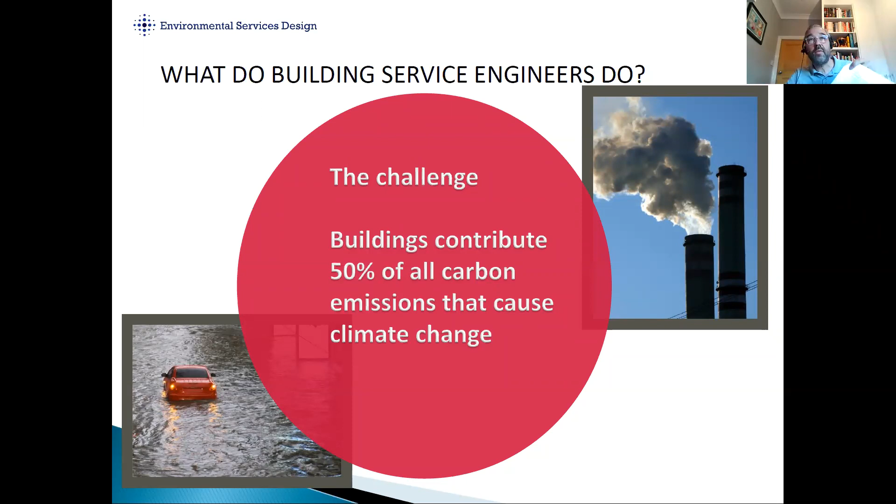Ultimately, aiming to reduce carbon to net zero, we still need to make buildings comfortable and safe places to live, work and play. So we use ever more efficient equipment and system design techniques.

Some of these involve low and zero carbon and renewable energy that you may have heard discussed on the news and in magazines and newspapers. LED lighting uses less energy than conventional lighting. Photovoltaics generate electricity on the rooftops of buildings. Heat pumps are a way of generating heat in a much more energy efficient way than gas-fired boilers.

Heat recovery on ventilation systems helps us to retain some of the heat that naturally gets extracted from bathrooms and kitchens. We can use solar power to generate hot water now on buildings, and we can use passive ventilation to cool buildings at night time rather than using expensive and carbon costly air conditioning.

All these are becoming much more commonplace, and over the course of your adult life, they'll be easily recognised, and some of the areas of engineering that we're involved in will be much more commonplace in conversations going forward.

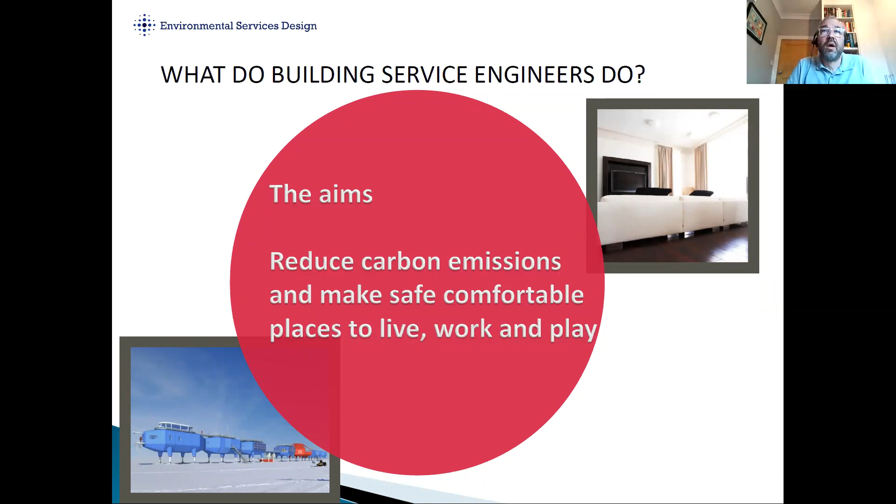In terms of South Kilburn, we're involved today on this presentation because Environmental Services Design are part of a design team looking at the regeneration of South Kilburn. We've been employed by Brent Council as part of a team with the architects, structural engineers, landscape designers and other professionals to help design the redevelopment, which is taking place over a number of phases.

As ESD, we've been working across 3 of these phases over the last 4 years. And those phases alone will deliver over 600 new homes to South Kilburn.

The building service engineers at this early stage of design are involved in undertaking the carbon emission calculations that we project for the new homes, aiming at this net zero carbon target that the government has set.

We'll be looking to plan out the energy supply to the buildings and how this is done in both a carbon efficient way, but also aligned with a much wider district heating system that was being installed across the whole of South Kilburn to provide heat into all the new dwellings.

We look at things like overheating of the dwellings and how we can control this so the new houses and new flats become comfortable places to live as global warming becomes a greater problem, and temperatures generally around London and the southeast of England become warmer.

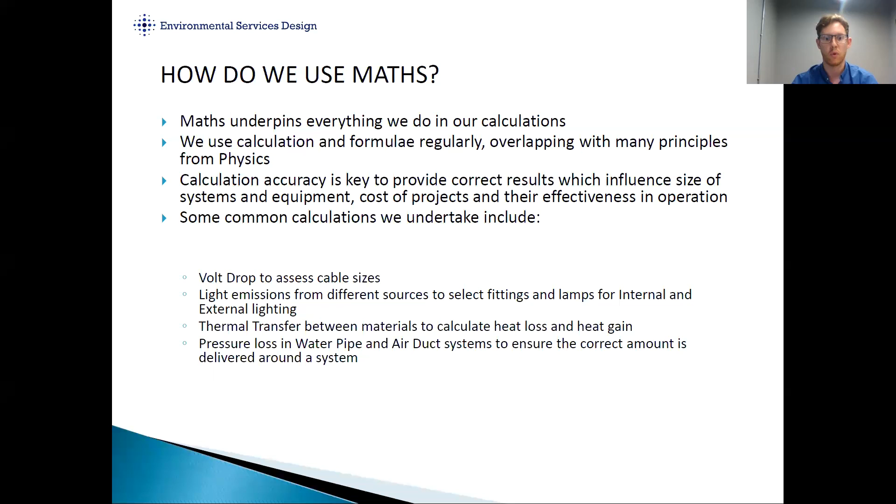So it's used in a wide variety of things, and it's a fundamental part of what we do. I'm going to pass you over to Will now just to do a quick introduction. Yeah, so Joe's an electrical engineer, whereas I'm a mechanical engineer, which deals with more stuff like the heating and the cooling and the water and drainage of systems in buildings.

So for when we do this, we use lots of formula, but the most common formula we use to do the heating and cooling is a specific heat capacity formula, which relates how a change in temperature affects the energy of a material: Q equals mc delta T. That's the fundamental equation that we use. I use it every day. That's the most commonly used, but it's the most important one because it tells you what heat you need in a building.

But we also use more complicated equations, like on the right here, we've got Bernoulli's equation, which relates pressure, velocity, pipe size, and other things for a fluid in a pipe. And we can use that first principle to take it to something like an orifice plate, which is in the bottom left. So an orifice plate is just a device that we use to measure how much flow is going down a pipe, and we can use the difference in pressure at two different points of a pipe to work out what the flow going down the pipe is.

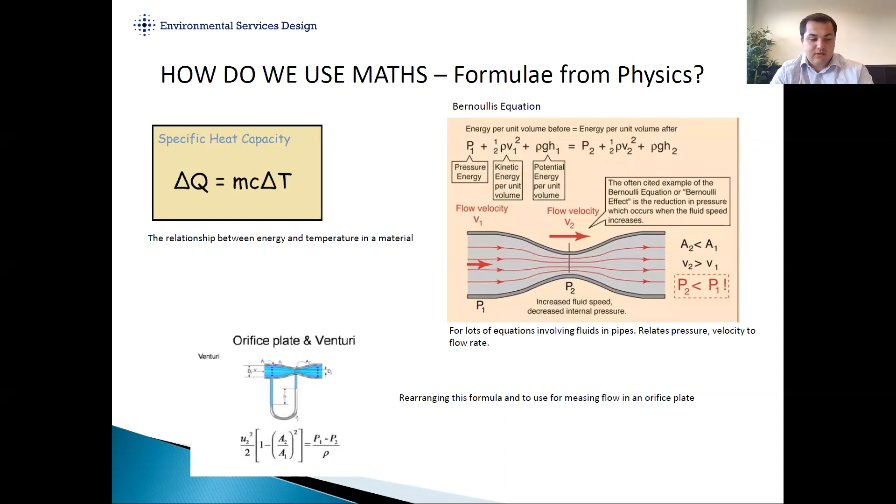And then there's also more complicated things. I said we needed to use Q equals mc delta T to work out how much heating we need in a building or how much flow we need down the pipes. But for that, we also need to know how much energy is lost from a room, so how much heating you need to put in. We do that by calculating heat losses. And there's loads of complicated formula there, which you can use to work out how much heat's lost through a window, how much heat's lost from room to room. You might even gain heat through your windows from the sun.

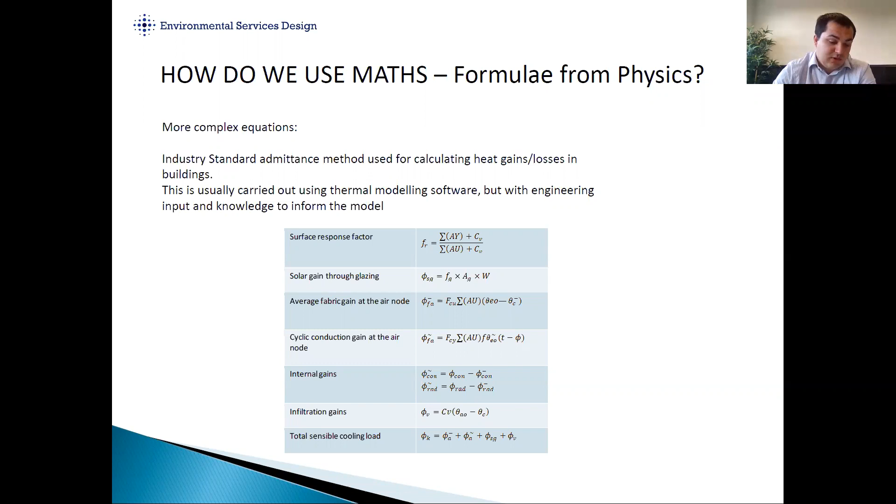I mean, you can do all these by hand, but we have a fancy software where you build a 3D model, you input the rooms, the walls and window types, and then it will work out for you how much energy you need to heat and cool a room. And that's something that is fundamental to what we do.

Yeah, so this is an electrical based equation that's used daily by electrical engineers. It's Ohm's law, the power triangle. This is basic principles, and it's used daily, but it's a very simple calculation. We've got an example of it later on, how we use it. I mean, this was developed in like 1827, and it's still true to this day.

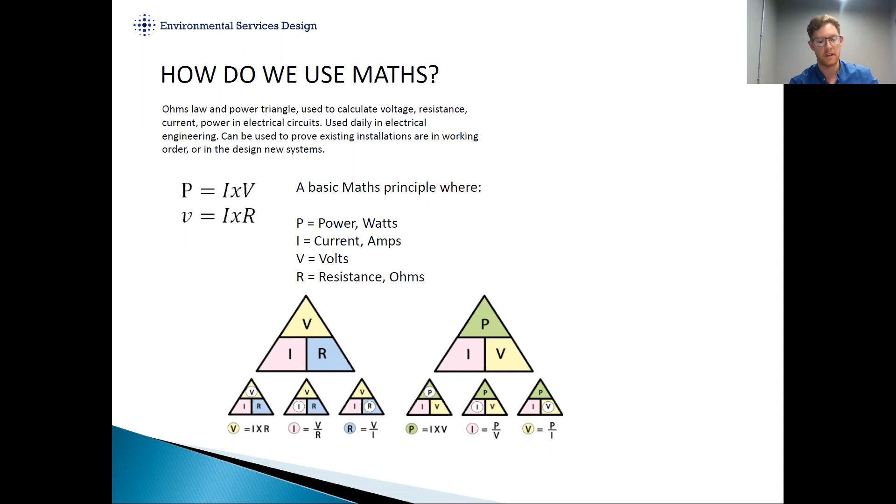The power triangle gives us the electrical energy that's transferred in each second, so we can work out the size of cables and the circuit protective devices that are needed, and how much energy is going to be used in the building. These are the foundation and first principles. We need the understanding of it, but again, it's now been speeded up. We've got design tools, software, tables, as Will mentioned, that we can quickly refer to get the answer to the questions that we need.

If you want to move to the next slide, John, we've got another example here of our mathematical equations used. So this would be used in lighting design. This is the inverse square law. Basically, the intensity of the light will decrease with distance from the source. This allows us to calculate the amount of light on a surface at a specified distance.

Again, we're not having to use this exact equation daily. It's built into software packages that we can then manipulate easily. We build a 3D model, we can place light fittings in areas and use that then to calculate the levels that we're going to get in certain spaces and areas and walls.

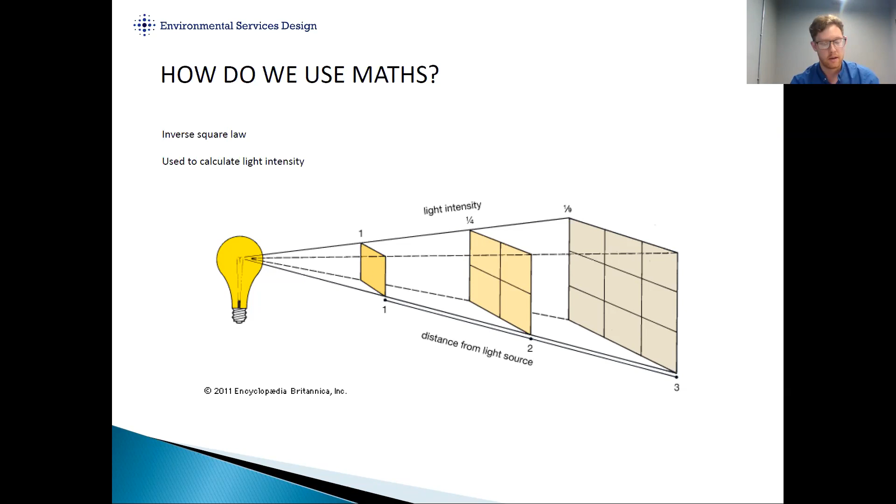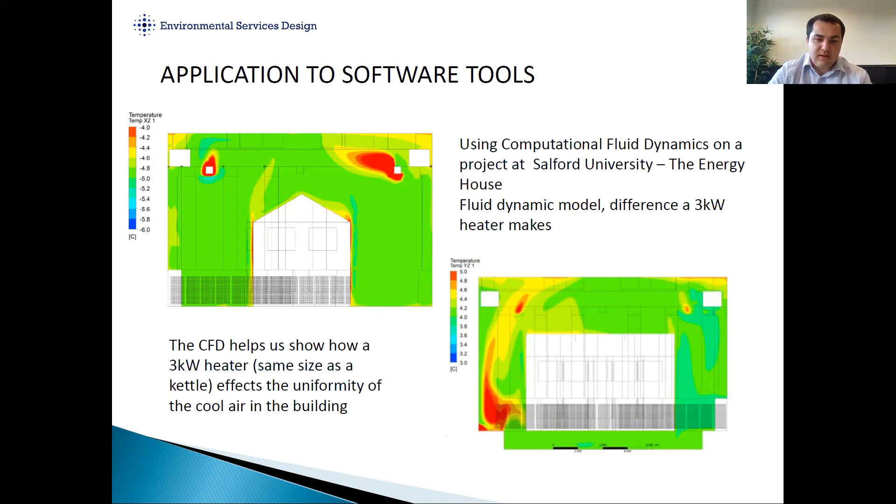Yeah. Do you want to move on, John?

This is another example of the software tools we can use, based on first principle math calculation. This is a lighting calculation done for Norwich County Council Chambers - they've got a big refurb project going on there at the minute. There's a large marble wall with a map on it. We needed to calculate the lighting levels in that area so they were safe and adequate to carry out tasks, but we were also concerned the marble wall might give off lots of glare.

So there are calculations we can do for that. You feed it into the model, and you can see in the bottom corner there's a 3D image of what we're looking at, and we can analyze the data the calculation produces. We can set different calculation planes to pinpoint specific areas in that room, to make sure we're happy everything's safe and a good environment for people using that building.

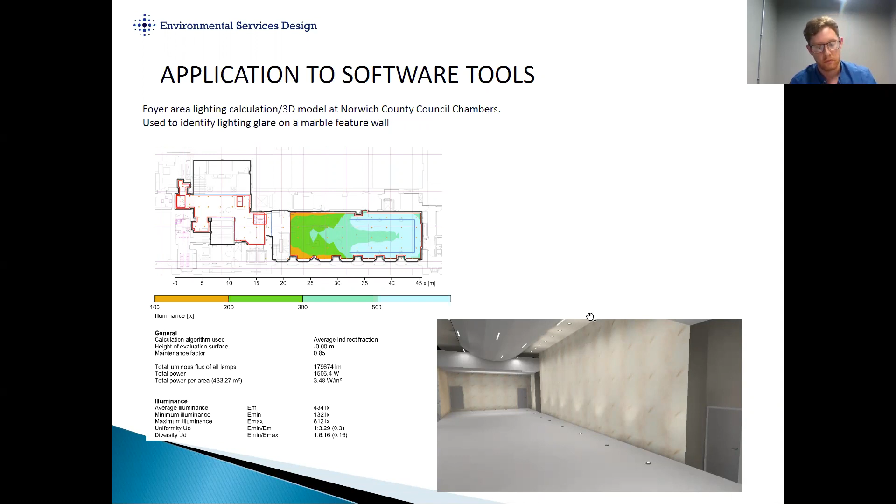I think we're just going to go through a few quick examples of some of the equations we use every day. This is specific heat capacity - if you've got some paper and a calculator, you might want to try and work this out while I explain why we'd use this.

This would apply if we knew we had a pipe with 2.8 kilograms of water flowing down it every second - we could then use the specific heat capacity. And if we knew the water was going out at 80 and coming back at 70 degrees, we could use that to work out how much heat was going out to, say, the radiators or whatever other heating device we had in the rooms. I'll give you a few seconds to work it out, then I'll let you know the answer.

So we're trying to calculate Q, the heat energy here, Will, yeah? So we're working out Q. We've got M, the mass, which is 2.8, C, specific heat, 4.18, and delta T, as I said, was 10 degrees.

To move the presentation along, the Q in this is 117 kilowatts. And then we can use that to help size - we know the flow, we can then help size the heating systems and the pipes we need around the building.

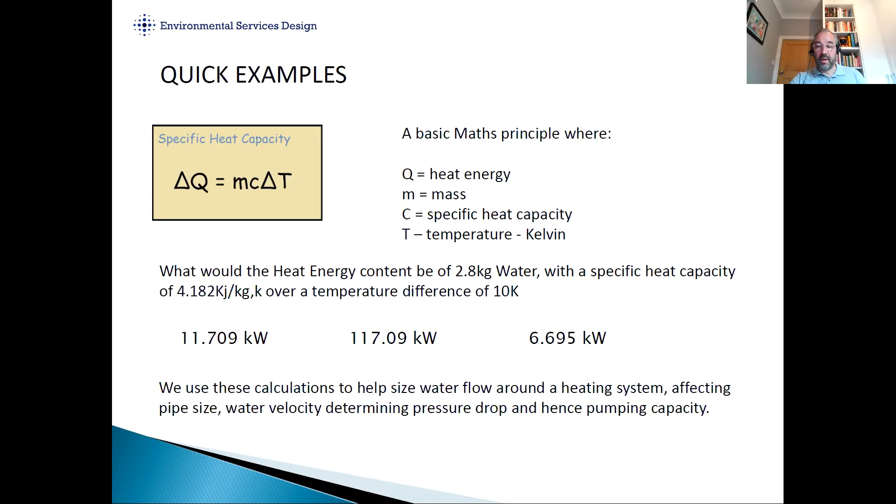Yeah, so we've got another example calculation here, an electrical example, used to find the currents in - this example is an electric shower, but this could be any piece of equipment in a building. It could be a motor in a factory, a pump in a heating system, flood lighting, car chargers, anything. We use this calculation to work out the current so we can size cables serving the equipment and select protective devices used for safety, to prevent electric shock or faults in the system.

Really easy maths, this. It's very basic, but it comes in handy. I'll probably use this multiple times a day in my career, and yeah, it's fairly straightforward.

So we've got the power rating for the shower in watts - in this example, 7.2 kilowatts, 7,200 watts. The system voltage in the UK is 230 volts for a domestic property. Using the triangle, we want to calculate I, which is the current, and that would be power divided by voltage. It's fairly straightforward - the answer is 31.3 amps.

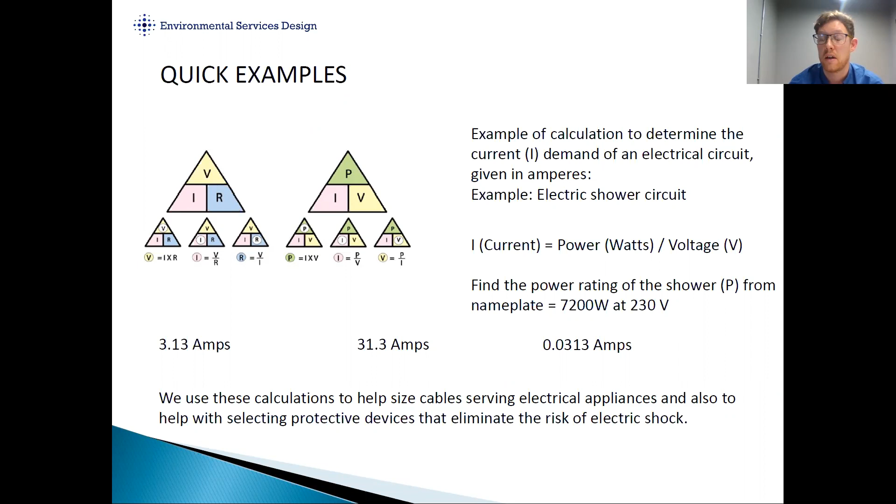As John was saying earlier, this is the slide he was talking about. So we might be able to work out the pipe size, but we've got to show it on something so that people can use it. So we put it on something we call a schematic, which basically just shows the whole heating system on one drawing. You can see we've got different rooms with radiators in, like that corridor, and we can see how these have pipes that go back up to high level and then across into a big pipe that runs up and down the building.

These pipes - you see on the very left-hand side of the drawing there's a pump, which pumps the water around the building so you can get the water at the radiators. So we need to be able to size this pump. For that, we use - you see all these numbers across the drawings - these are what we call crosshairs. And at the bottom right, we show what the crosshairs mean.

So the flow rate, that's the M from Q equals MC delta T, and that's just the amount of water flowing down the pipe. We've got the pipe size, but when you've got an amount of water going through an amount of pipe, it's going to flow at a certain velocity. We need to make sure we have the right velocity, because otherwise water going too fast down a pipe is too noisy.

And then in the bottom right we've got the pressure drop. As water goes down a pipe, the smaller the pipe, the harder it is to push the water down it. This pressure drop is crucial for when we are sizing the pumps, because we don't want too high a pressure drop, or we have to have a bigger pump, which is more expensive, and nobody wants to spend the money on that.

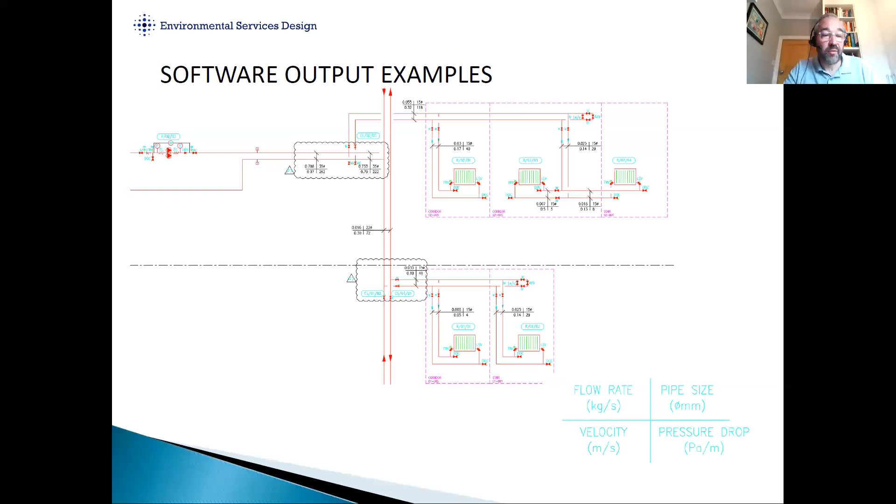These type of calculations also help us aim to reduce energy consumption. Energy consumption usually means higher rates of carbon emissions, and if we get our calculations right here - size the pipework correctly so there is not excessive pressure lost down the system, as Will explained - we can size those pumps efficiently, and make the system overall much more carbon efficient, which helps the building be more carbon efficient.

This is just an example of how a room can lose heat through windows or doors, or through the roof, but it can also gain heat from the sun. So you need to be able to work out what size heater you need to keep that room at 25 degrees, or whatever temperature it needs.

But when you get into the room, it's more complicated than just putting one heater in the middle. You can see that the radiator actually works through convection - it blows the air around the room, the hot air rises, rolls across, drops down and comes back. We also need to take into account stuff like computers and people - they give off a lot of heat, which when coming into air conditioning a room, it's vital that you take those into account.

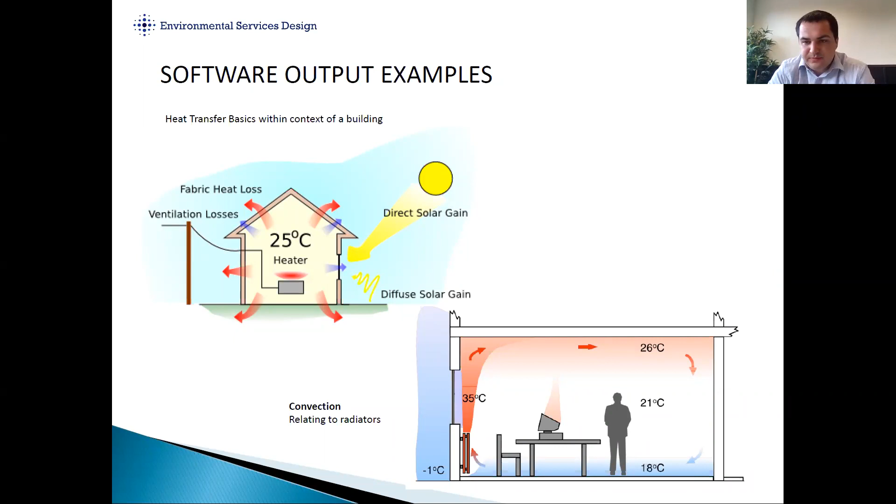To give you some more images out of some of the software tools that we use - one of the types of engineers that we employ, we term them building physicists, and they spend all their time analysing how a building's performance is going to work, using some of the calculation software tools we spoke about with Joe and Will. More specifically, they're looking at the energy consumption, and they use really complicated computational models to build the building itself within the software, and then we can use this to move it around the site and see how it interacts with, in this example, the pathway and orientation of the sun.

Solar effects on a building can be huge. It can help with solar heating. It can be a hindrance because it adds too much heat that we then have to take out with air conditioning. The line of the sun on a building can help with shading, and it can help with things like renewables, particularly the selection of solar photovoltaics. So we use all these interactions between the engineering that John will do, and also the building physicists, to help get the most efficient position we can on the building.

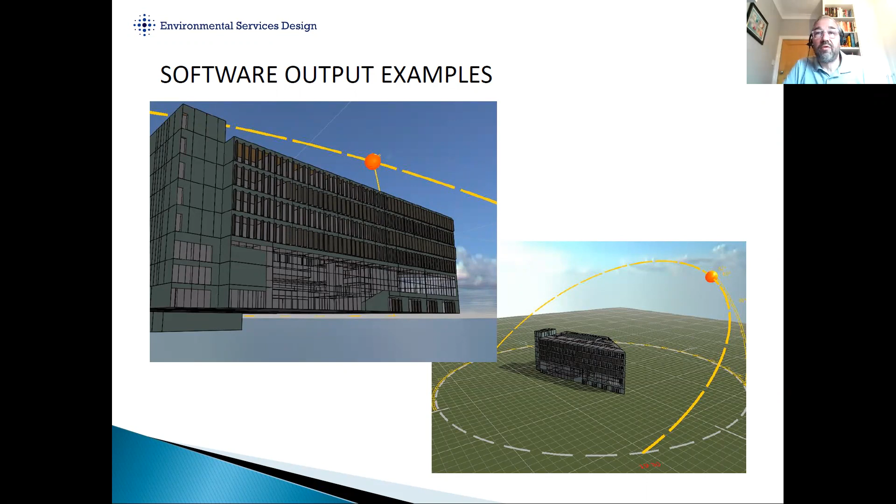And then ultimately, we translate all these calculations into a design. It might be a difficult slide to read here, but this is a project that we are currently working on. At the bottom of the screen, this is a new Riverside stand at Fulham Football Club, and you can see the tiers of seating here, the roof over the stand. I think this project's actually got a swimming pool on the roof, and there are buildings down the side as well for officials and press and things like that.

On the left-hand side, you can see a representation of our 3D model. We draft all our systems designs in 3D now, and these are designed to help coordinate all the routing of the pipe work and the duct work, the electrical containment, the position of light fittings and heaters, ventilation equipment, all within the building. So this drawing at the top is what's hidden away behind the stand that you see on the right-hand side.

So I just thought it'd be good to also let Joe and Will explain a little bit about how they got into engineering with their background. So I'll flip back to you, Joe.

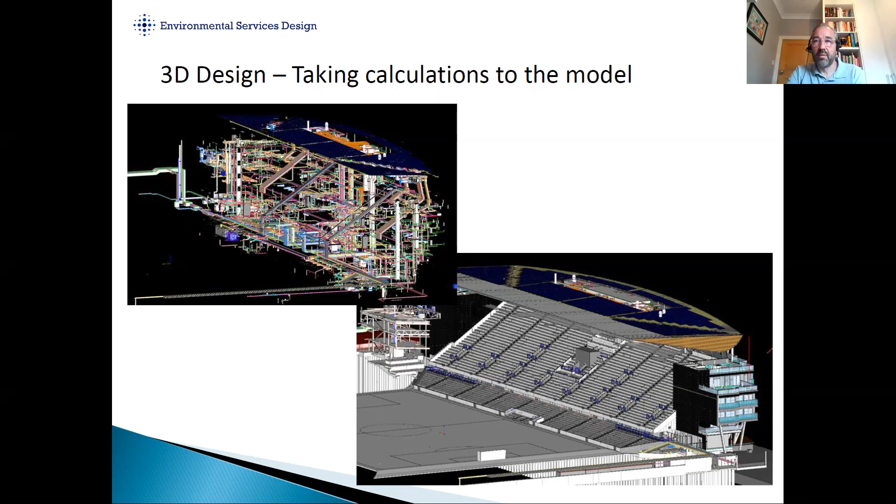Basically left school, didn't really know exactly what I wanted to do. Finished with GCSEs in maths, English and science. Basically enrolled as an electrical apprentice at college, and I went working for a local plumbing and heating company. We were just wiring up boilers and heating systems, domestic buildings. Went to college sort of one day a week. Worked as that for a few years, numerous jobs really, floated about. Worked as a self-employed contractor for around 10 years, and then I progressed to larger projects, including healthcare and educational buildings. And really there I got more of an interest in the planning and design of all the building services, and instead of just installing them, I was more interested in how they all go together in the process of designing the building.

That led me to enrol on a degree course after completing the foundation degree at a local college and university. This challenged me in new ways, developed new skills. But the time that I had as an apprentice in industry, installing the systems that I'm now designing, has been valuable, and the experience I've gained there has really helped me during my further studies, and in my role now as a design engineer. That's basically me in a nutshell.